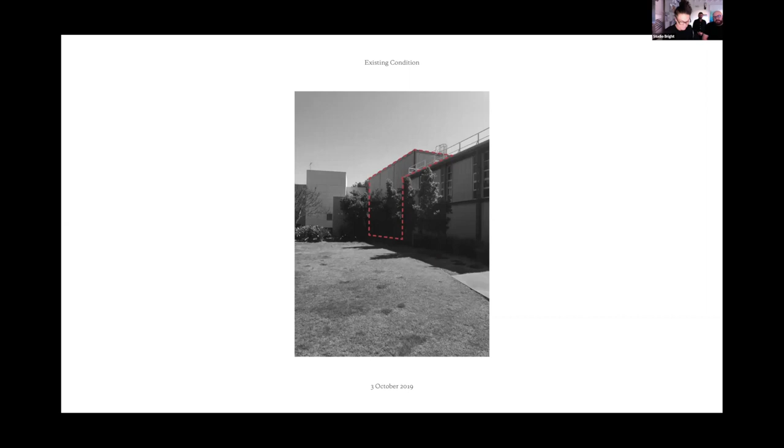The existing research spaces were all located separately across the university. Office-based workspaces largely for computer programming, and workshop spaces where robots are in operation.

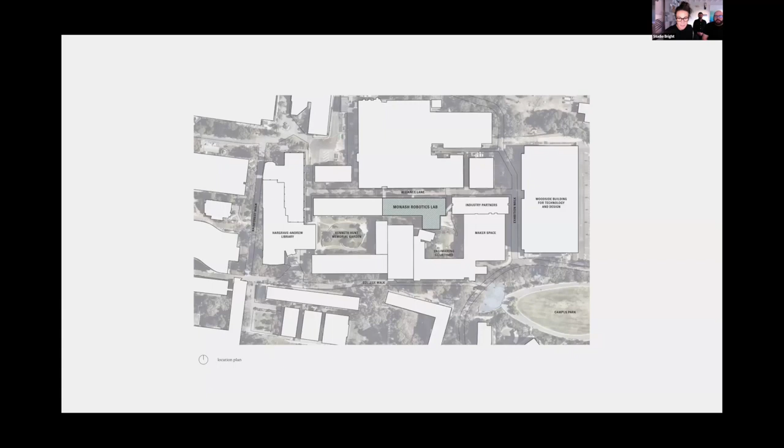Just some siting diagrams. That's the existing space with the high voltage shed at the rear, and some of the existing site conditions. The new Woodside building, just at the end of Alliance Lane, meant that Alliance Lane was going to become a key pedestrian thoroughfare.

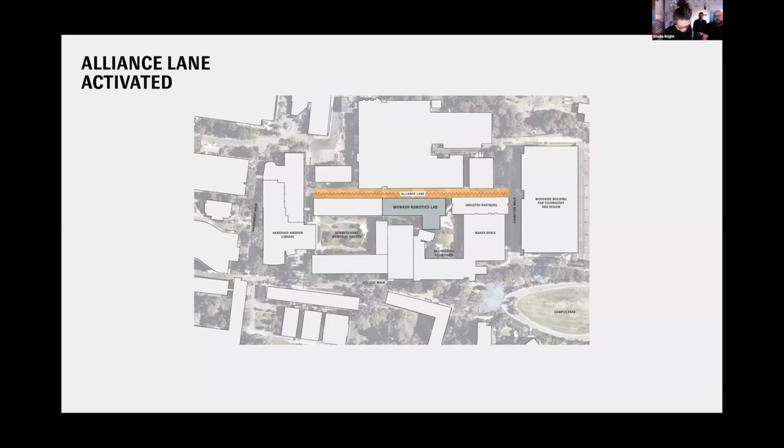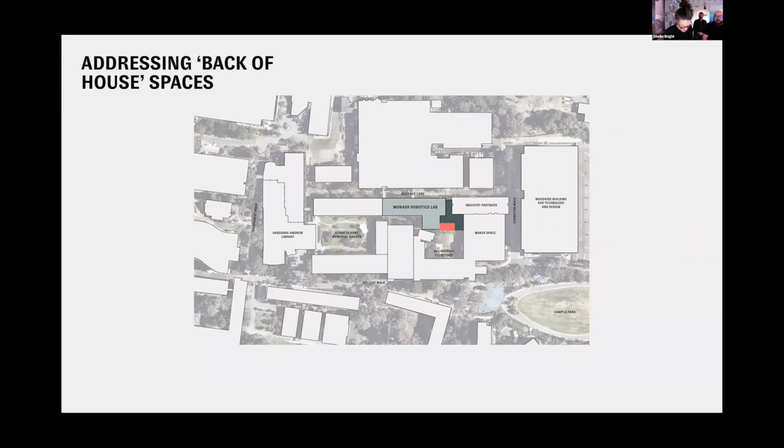We considered the existing courtyards and started to look at this building in red, building 36A. This area was largely seen as a loading dock with inactive facades all around, blocking view connections.

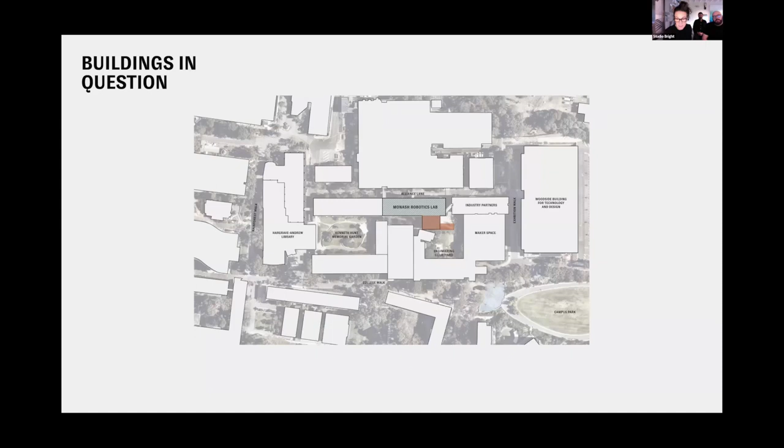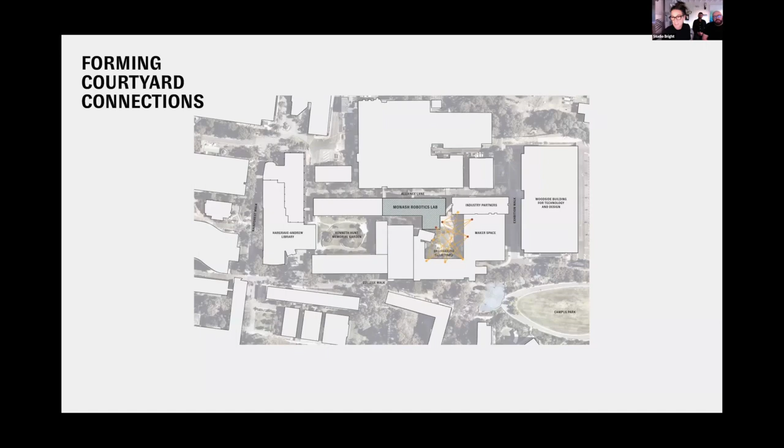So we suggested the brief should also include building 36A and the demolition of it, which meant we could activate the facade all around and connect Alliance Lane with the engineering courtyard, and importantly, allow for connections with adjacent industry partners and the makerspace across the courtyard.

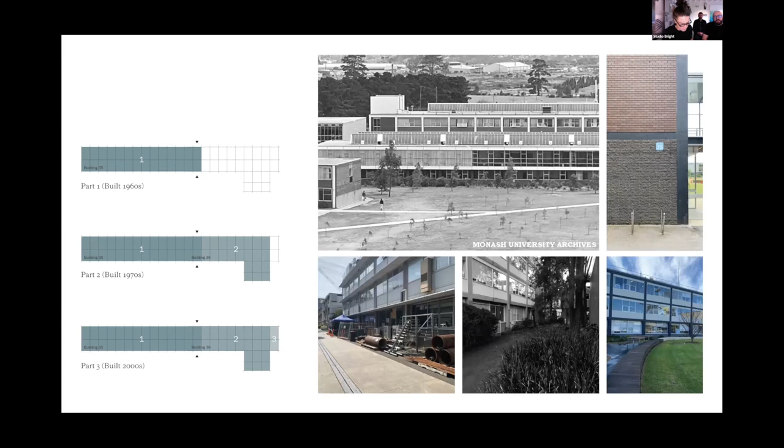That's the existing view to the courtyard with building 36A in the way. We looked at the original 1960s building and obviously needed to work around the structural grid. Internally, the existing corridors had no light and no sense of what was happening behind frosted glass doors.

On Alliance Lane, we realised that what looked like a junkyard was actually materials testing underway, with student work spilling out to the lane. We saw Alliance Lane as a place of action and testing. It was previously also a crash testing site.

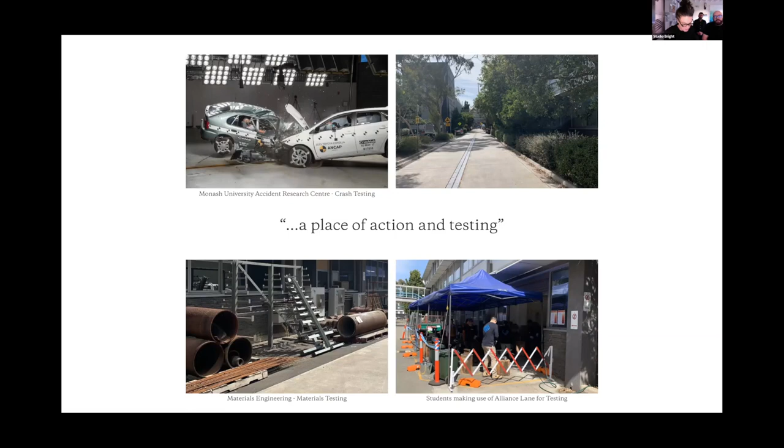And we wondered what the new Alliance Lane might be adjacent to a robotics lab. We thought it might be a place where you might meet a robot, and that human robotic testing would spill out to the lane.

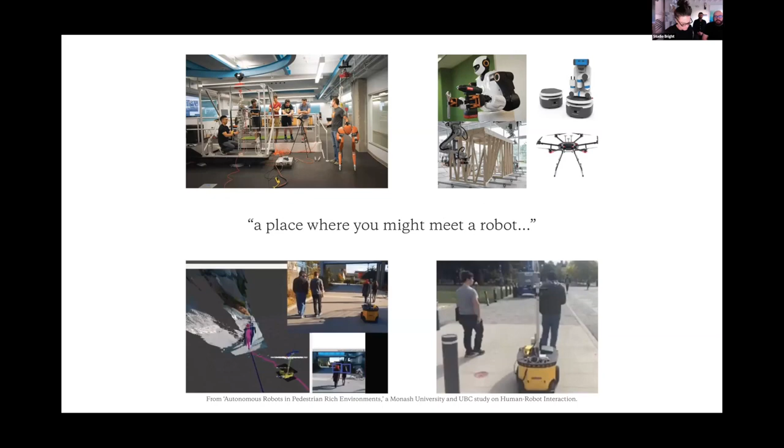Removing building 36A provided more facade frontage. We pushed out some of the robotics program to allow for oblique views in, and proposed a new shade canopy as a unifying element that allows the robotics work to be on show.

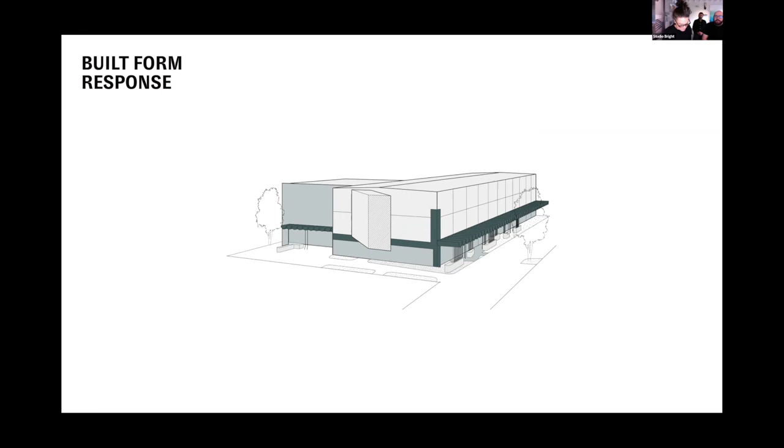The half round shapes come from the original materials experiments we saw on the lane, with new landscape and seat elements contributing to the public realm.

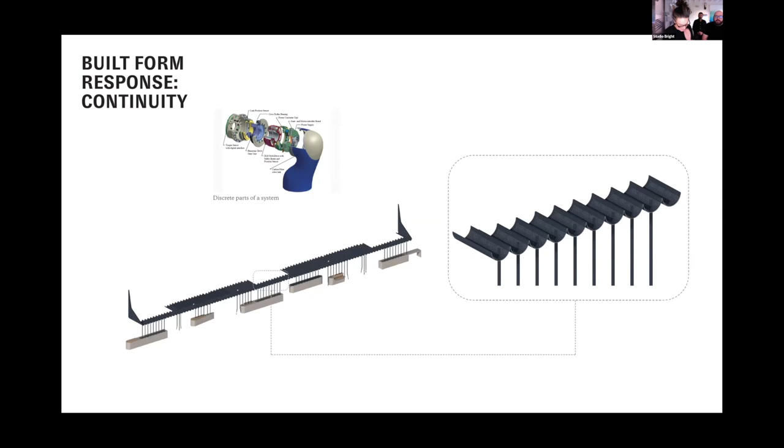So for the canopy system, we thought the canopy design could be expressed as a series of repeated discrete parts, with robotic articulated joints and legs that might look like they could get up and walk away, connecting with the landscape and seating elements.

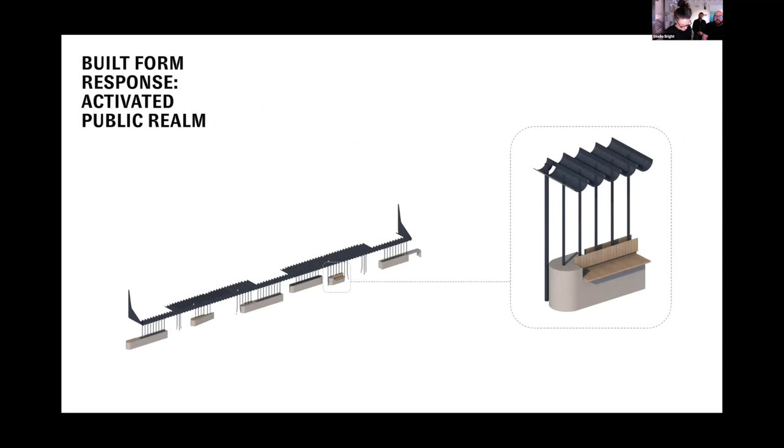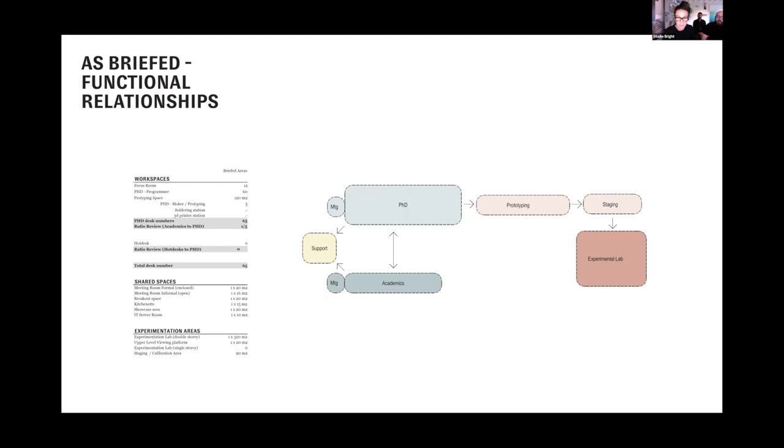I'm going to pass you to Rob Hillman now to talk through some of the details and testing.

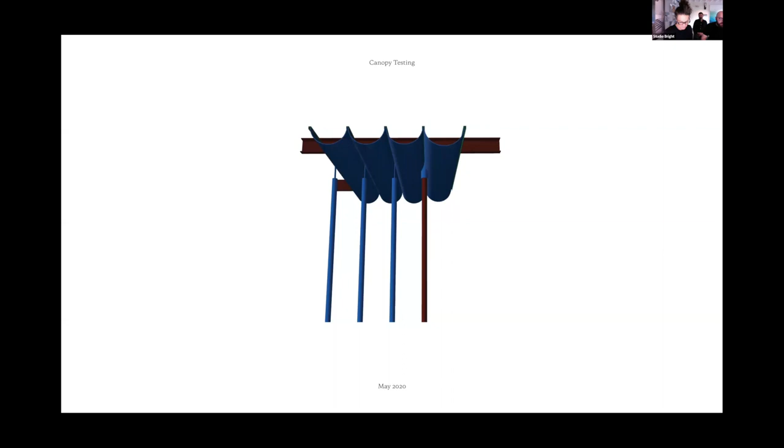Thanks Mel. The design of the awning went through many different iterations. We tested different profiles, set outs, connection junctions, and discussed many times whether or not there should be a gap between the flutes.

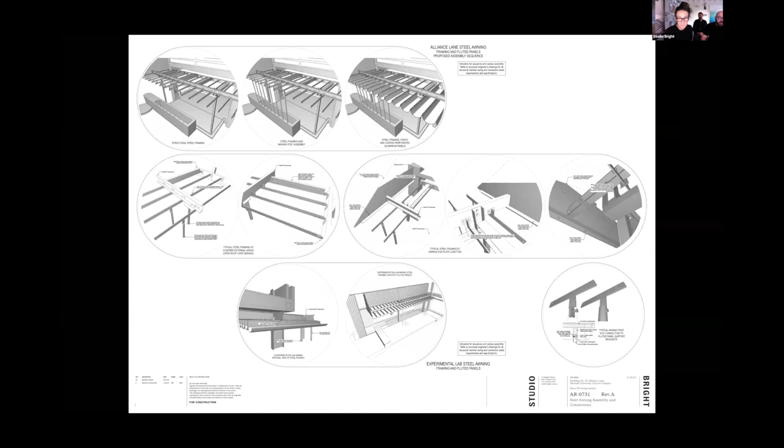Through this refinement of the detailing, we were aiming to express the tectonic nature of the canopy, a language of assembly. We carefully described the assembly sequence, essentially documenting to shop drawing level. Due to the tight construction program, each fluted element was scheduled and located with key plans to avoid the shop drawing review process on site.

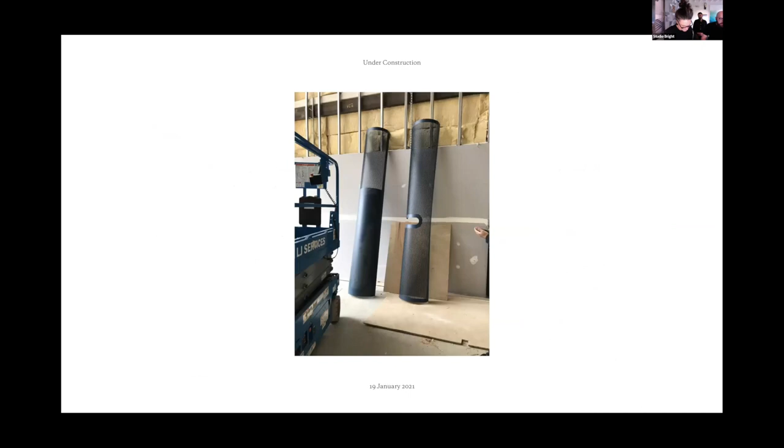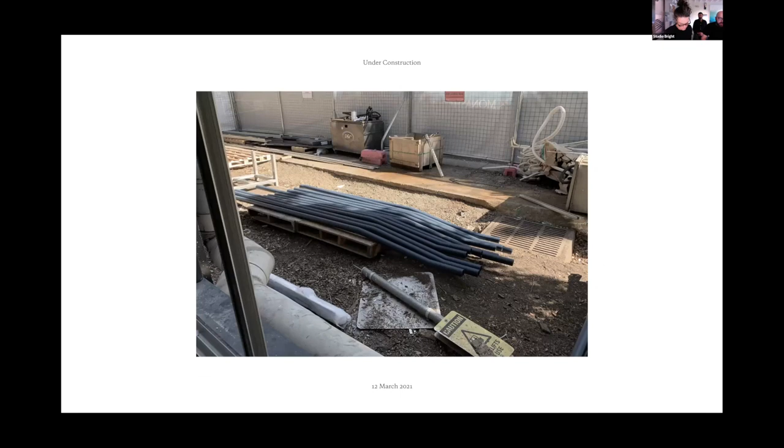And here are the prototypes on site. You can see the slots to allow the half rounds to be installed around the primary structure. We carefully arranged the kinked leg elements under the canopy to achieve just the right amount of animation.

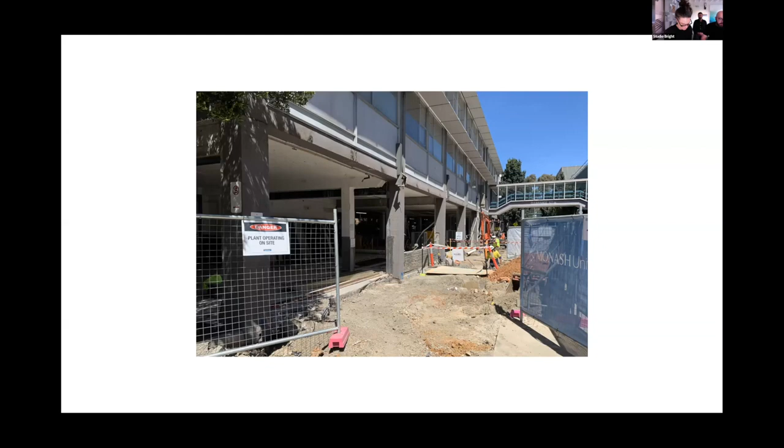The set out for the canopy allowed for tolerance by allocating the two flutes in front of each existing column as components that expand or contract to make up for the inconsistencies of the existing structure. You can see that in the next few slides here.

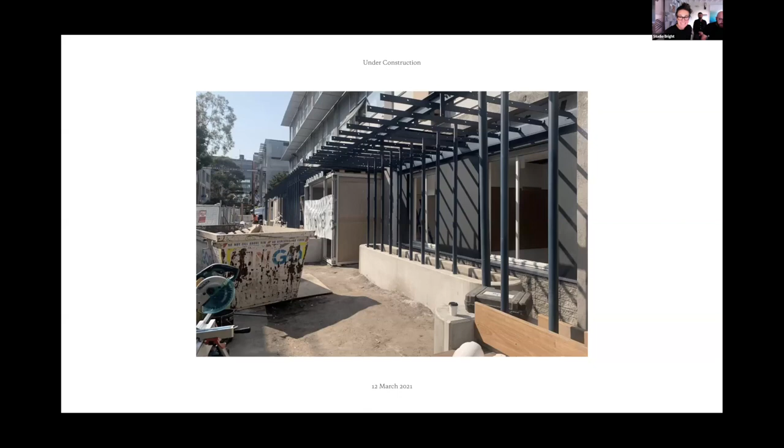We worked painstakingly around the existing building with significant services above and below the ground floor level. The canopy weaves itself above new pop-ups, below existing bridges, and terminates towards the end to allow for the retention of mature trees.

In these areas, we introduced smaller awnings to protect individual windows, aligning with the quieter function of these spaces.

This project brief was really to deliver an internal fit out for the refurbishment of the building. We think the outcome is achieved well beyond that, all within the original budget and timeframe, during COVID.

We were able to show the engineering faculty the reciprocal benefits of opening up and contributing to the campus, and were therefore able to significantly improve the public realm outcomes of the project, well beyond what was expected or requested.